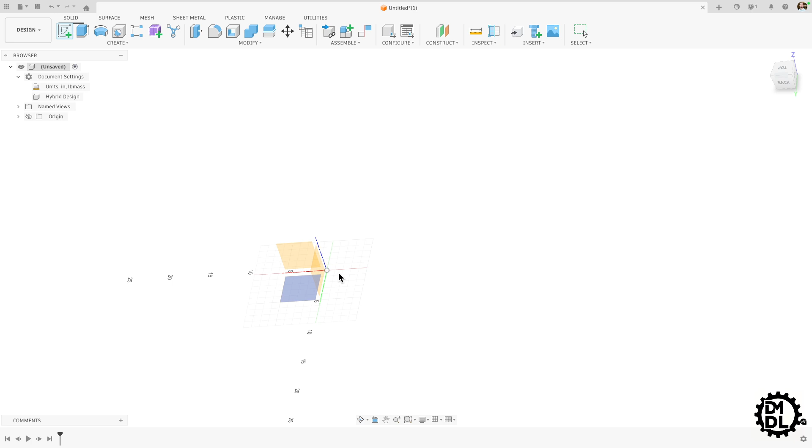As always, let's start with a sketch. Let's go on the top here. I don't know why we're upside down. Let's turn that around. There we go. Create a rectangle, center rectangle. Let's make this thing pretty big. Let's make it 15 inches by 24.

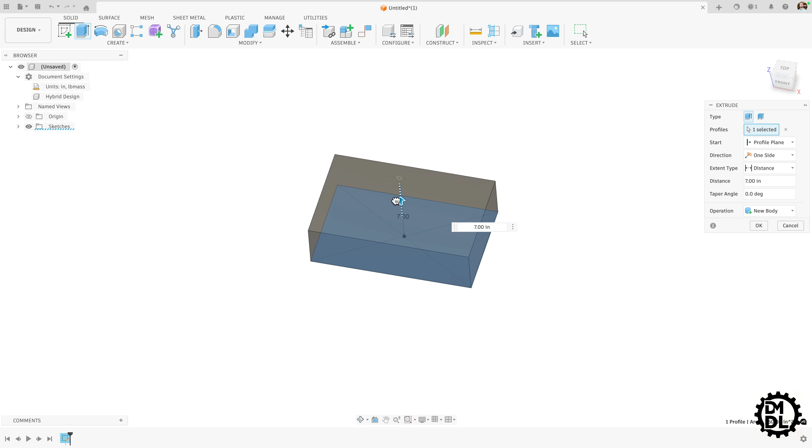Let's extrude this out, make it big, 12 inches tall. So we have this box and we want to shell it out. Maybe we are trying to design a cardboard box or a treasure chest, who knows, but we want to do it quickly and efficiently. And there is a very helpful tool for that, which is the shell tool.

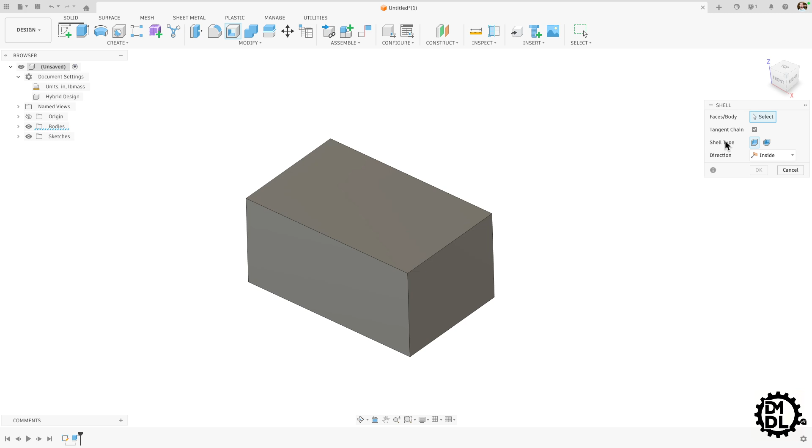So let's click on that. We'll do a sharp shell as the shell type. Click this face. Let's make it relatively thin on the walls, 0.25. And there we are. In seconds, you have this shelled out rectangle.

But there's even more you can do with this tool. So if we reopen it, let's say instead of shelling out the interior, you want to create some thickness on the outside. So you can go from inside to outside. You can drag it out the same way. And now you can see it's starting from the original size we had and adding material to the outside of that original shape, getting rid of the shape that was in the middle.

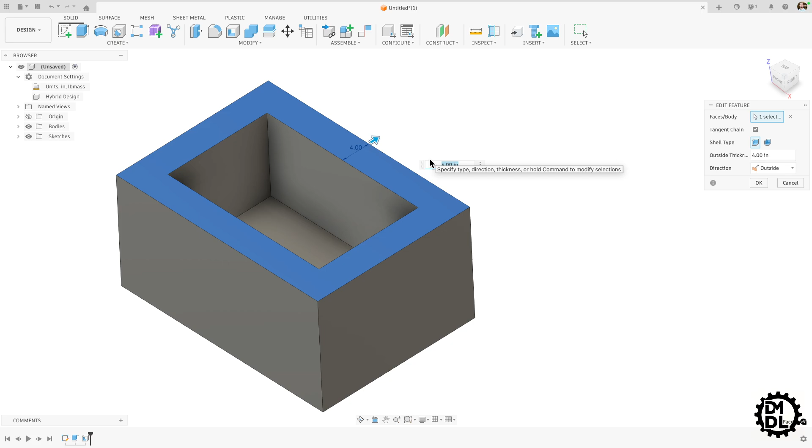So now we are still creating a shell, but it's going from the original size outside. This is very, very handy if you know the size of something you want to put inside the box, but you don't necessarily want to design all of the box around that. You can just create whatever you are putting in the box, whatever size that is, and then create a shell around it. Now we have a very similar look, but used a slightly different process to get to it. And that's not it.

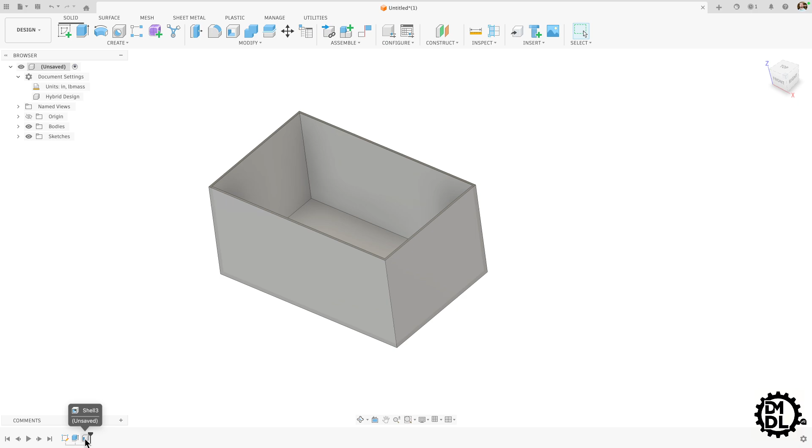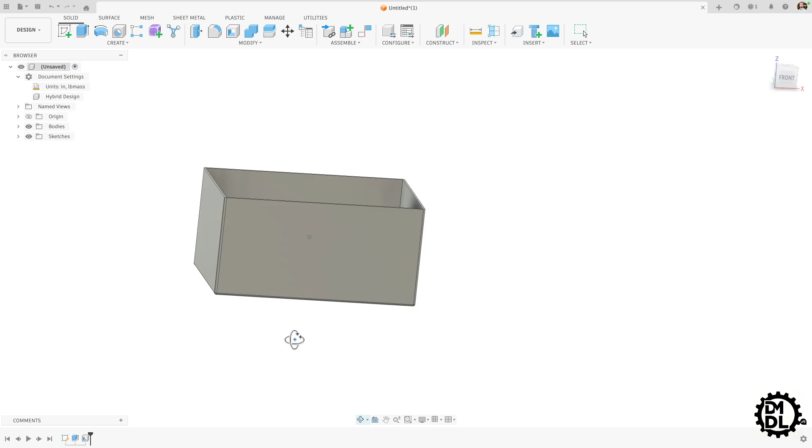There's actually even more we can do with this tool. Let's say you want this to not necessarily be a hard-edged box like a cardboard box, but maybe one of those foam coolers that has kind of a rounded edge. Well, you can use a rounded shell, and look at that. Now the edges are rounded. You didn't have to apply any additional fillets or anything else. You could simply do a rounded shell.

So this is a very quick way to shell out a part, and a very useful tool when you're starting with something that you know you want to shell out. Maybe you don't necessarily want to create additional sketches to create that shell. This tool just does it all for you.

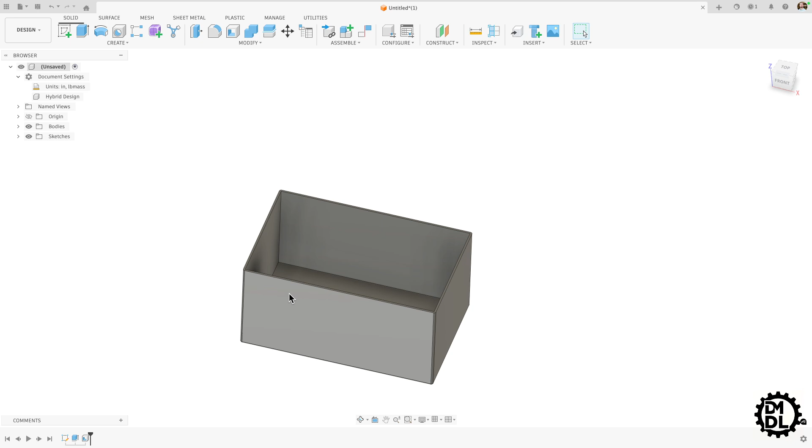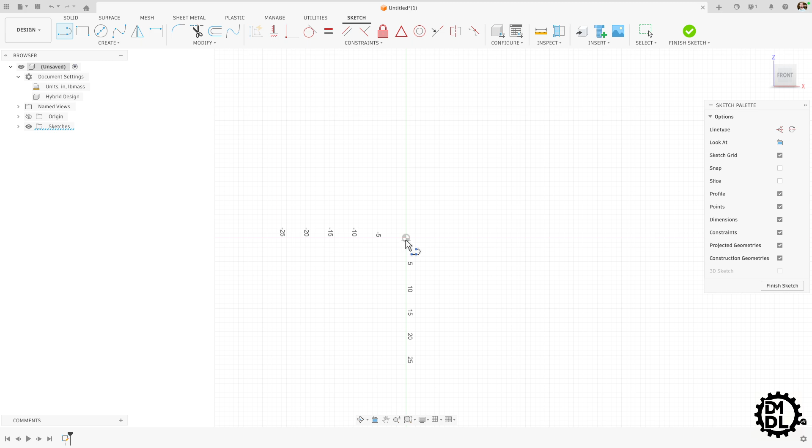Now I also want to show you what you can do with this shell tool on a different shape. So let's get rid of this rectangular shape. I'm going to delete the timeline, start over. Let's start with a sketch. Let's go to the front, create a line. Let's see, we want a line. Actually, let's start with a circle.

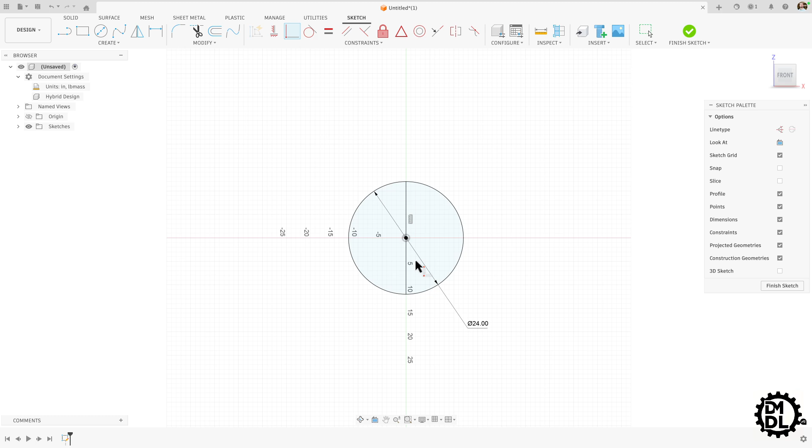There we go. Let's add a size to it, 24 inches in diameter. Now let's add a line, going right through the center of this. Okay, and why is that not constrained? Let's see. Oh, it is not constrained because it's not constrained to this point. So that is a very easy fix. We'll make it coincident. There we go. Now you can see this sketch is completely constrained.

Let's finish that sketch. Come up here to revolve. Select half of this, and then for our axis to revolve around, let's select that center axis, and now we have a sphere. Okay, very quick and easy way to create a sphere.

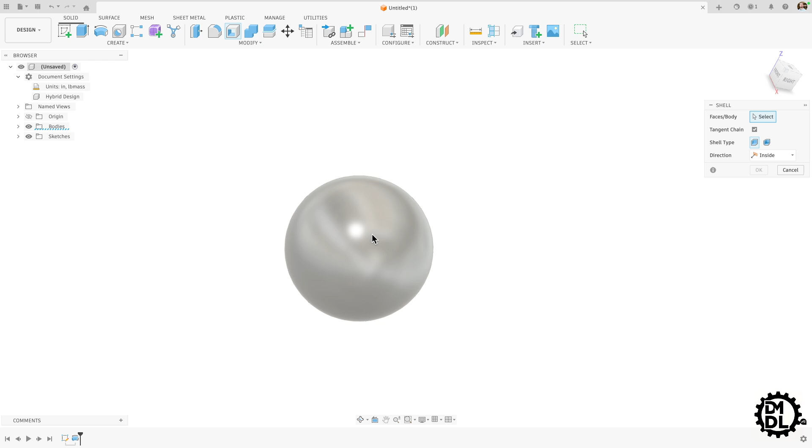Now let's say we want to shell out this sphere, maybe to make something like a bouncy ball or a basketball, something filled with air. Let's go back up to shell, click the body, make sure it's selected, and do a sharp shell. How thick do we want this? Pretty thin, let's do 0.05. And how do we know if it worked?

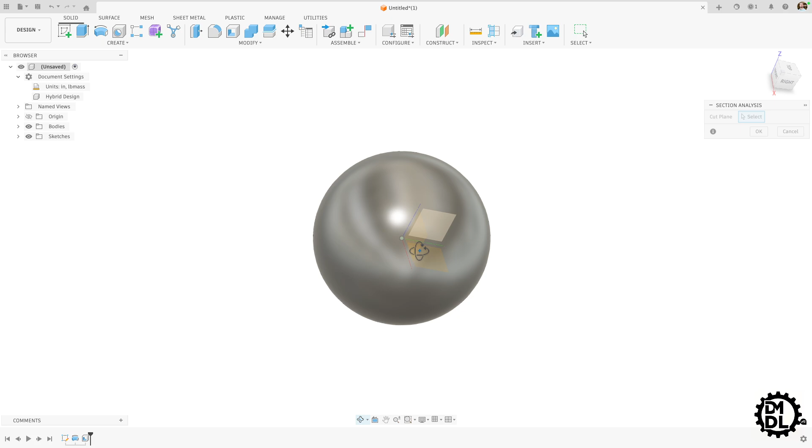There's a few ways you can see if it worked. The first way would be to use the inspection tool, section analysis. We'll click one of these planes to section this, hit OK, and there you go. You can see there's a very obvious thin wall right there, and the shell tool has worked. Now we have this very thin walled ball.

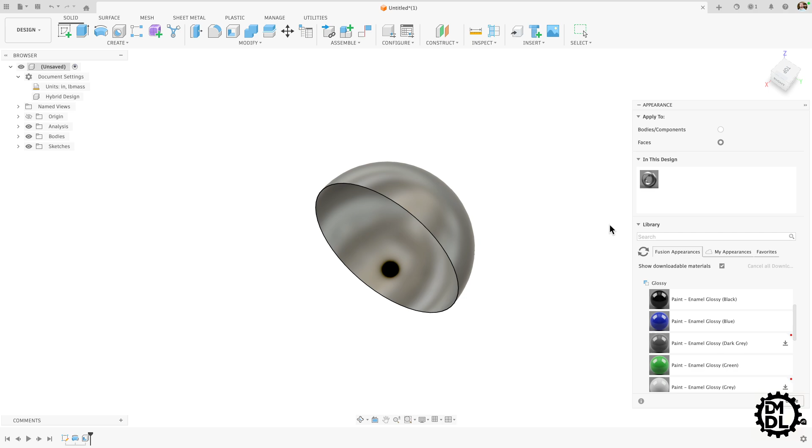I haven't tried this before, but let's say you just want to see the difference between these very easily. Let's use paint. Click on paint here, let's go glossy, we need to download a few of these. Red, let's do this, we'll do blue on the inside. Make sure instead of applying to the body, it's applying to the face. We'll do blue on the inside and red on the outside. Okay, so that kind of helps convey what's going on here.

Let's get rid of the appearance, turn off our section analysis. We have this red bouncy ball. What else can we do with this?

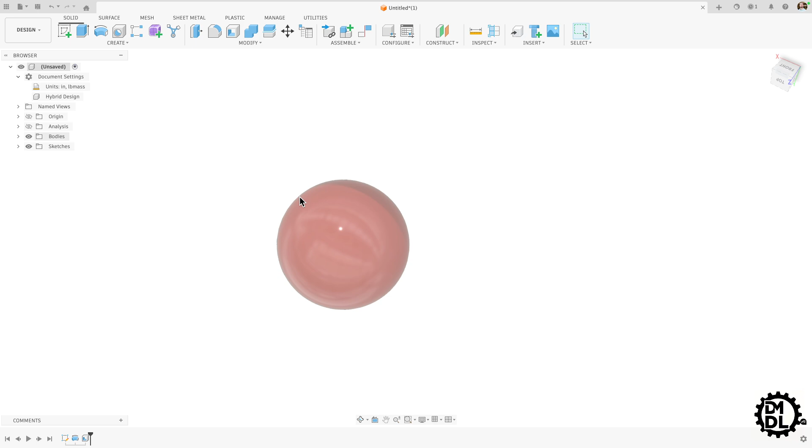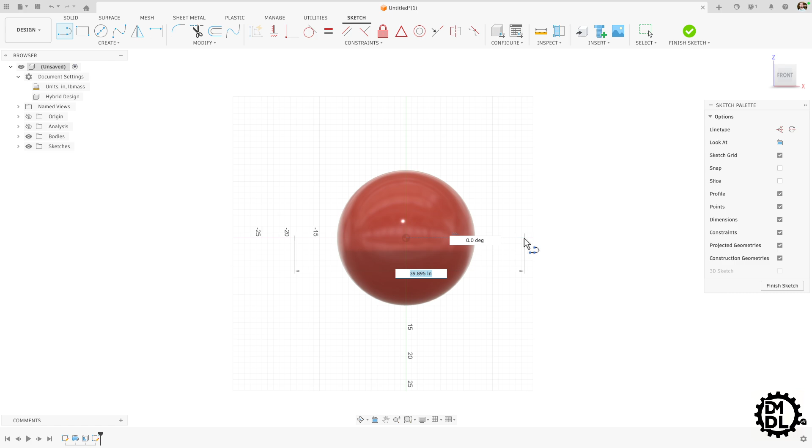We've also learned in a previous tutorial how to use the split body, so let's give that a shot and maybe split this in half. Let's create a sketch, let's look at the front of this, make sure it's up and upright right there. Let's look at this face. We can draw a line through this. Doesn't really matter where it starts and where it ends, this is unconstrained, but in this case that will be just fine. Finish sketch, and we have this line going through our ball.

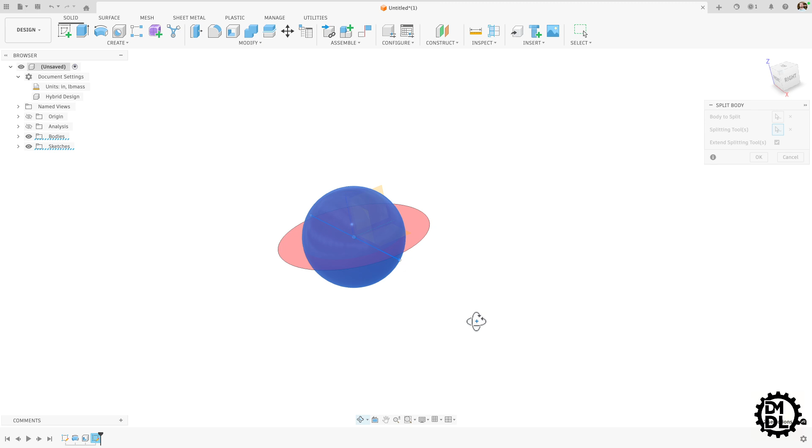Now we'll come up here to split body. Click on our red bouncy ball, splitting tool is this line. I like this because it kind of looks like a planet, looks like Saturn that has a ring around it. That's pretty fun. We'll hit OK, and now we see the split through it.

Let's see what that looks like. Let's hide one of the bodies. And here again we have half of this, but in this case it's not just a section analysis, we actually have two separate bodies.

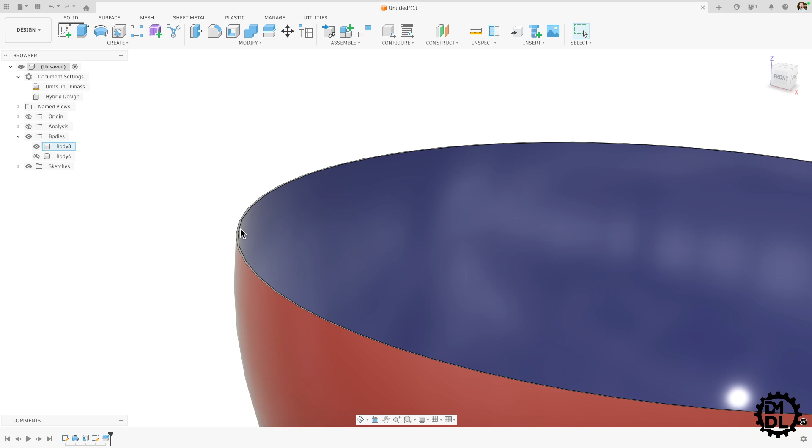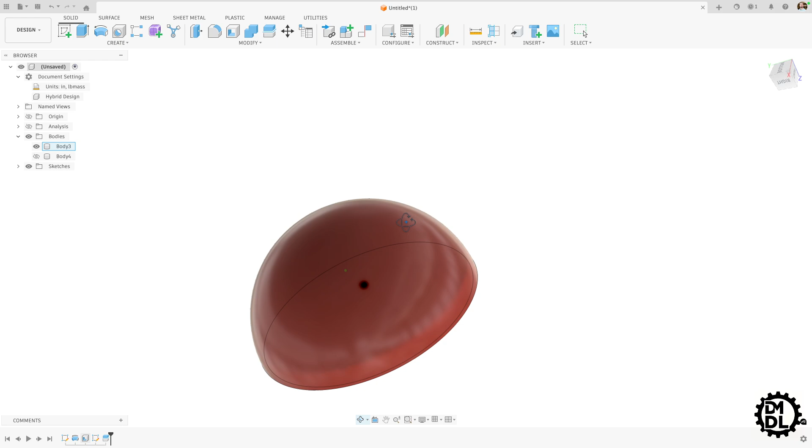But what if we decide we actually want this to be a little bit thicker? Let's go back to our shell tool, let's change this to 0.125. Hit OK, and now the walls of this are thicker. Honestly, I still want it a bit more, let's go back and edit this. Let's make it 1/2 inch. There we go, and now we have this half sphere, this hemisphere, which you could use for all sorts of stuff.

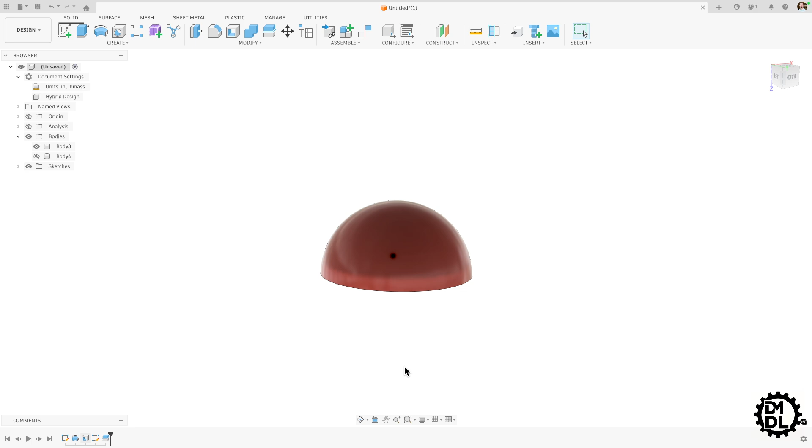Maybe you're trying to design a bowl, maybe you're trying to design one of those rubber poppers. If you're my age, 30s and 40s, you might remember this, where there was a little half of a ball or a hemisphere like this, and you would push one side down. It was made of rubber, and then it would pop and fly into the air, and it was a pretty fun little toy. Either way, that is the shell tool.